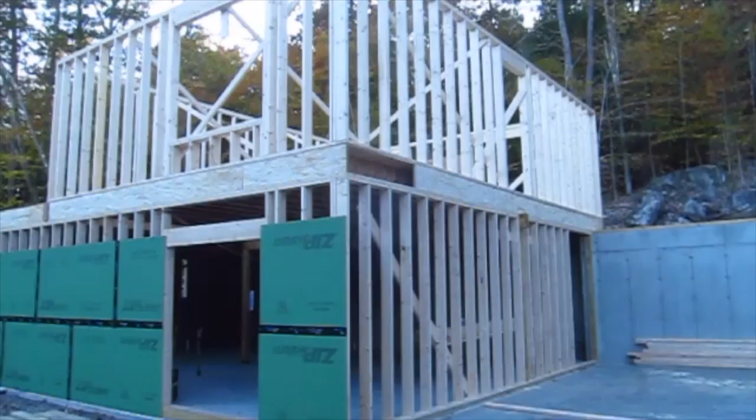Tim Carter, AskTheBuilder.com. It's day number 2 of the rough carpentry, and they got a lot more done. Let's take a look at what happened. First of all, remember, I am not building this home. Any mistakes you see, they're not mine.

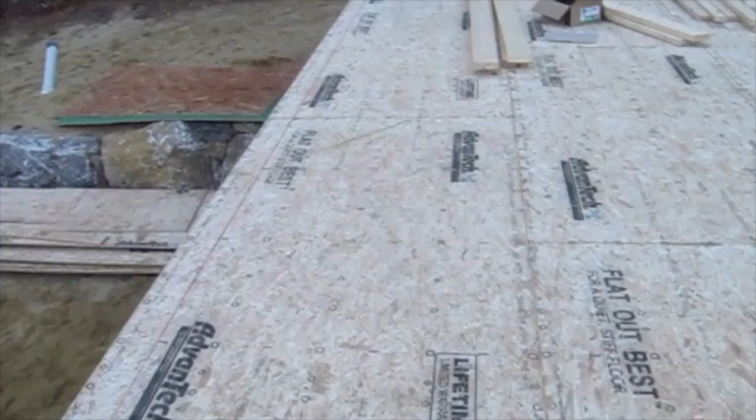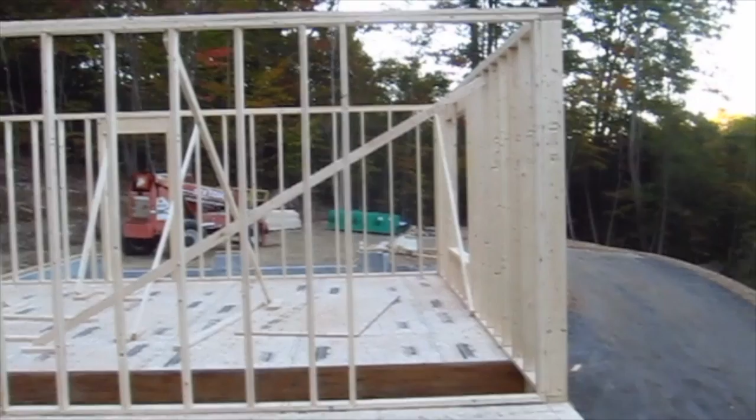Let's get started. Here's the dance floor. They got the subfloor on. In fact, they had the subfloor on this morning by about 11 o'clock, 11:30. I stopped up to try to get some action shots, but it was a little too busy here. I didn't think that they would appreciate it. But you can see that they got the subfloor completely on, and they've got half of the walls built here

for the, you would call it second story. Well, it's second story here on the front, because you can see we're pretty high up off the ground, but back in the back of the home, it's only about 4 feet off the ground. All right, let's take a look at a few things. This is going to be an interior wall right here, this long wall. And I just wanted to explain, I talked a little bit about this in the video yesterday, but this is a diagonal brace to keep this wall square so that it doesn't rack one way or the other.

But kind of surprisingly, they put some nails down here at the bottom, and they put about 4 nails up here at the top. They didn't put any intermediary nails. It would have been nice. Just helps hold it a little bit straighter, that's all. But anyway, that way this wall is not going to rack. It's not going to tilt this way or that way. And that's a good thing. And you can see they have all the other walls they built braced really well. A lot of bracing in here so the walls don't tip over.

Here's another diagonal brace with this 2x6. But they also started to put the sheathing on, which absolutely will keep this wall stiff as can be. But we're going to go out and talk about the sheathing because I feel they made a big mistake.

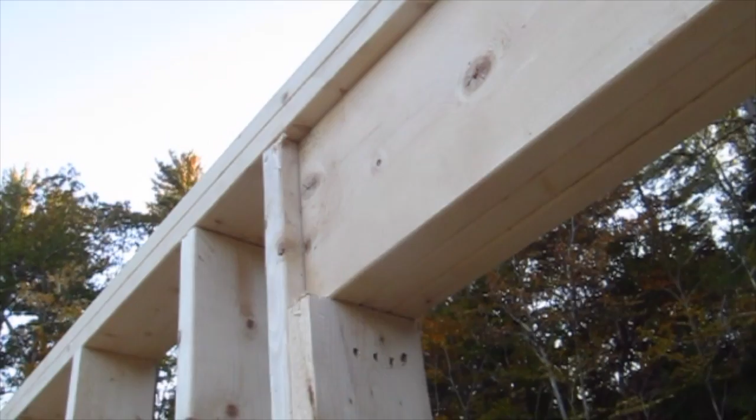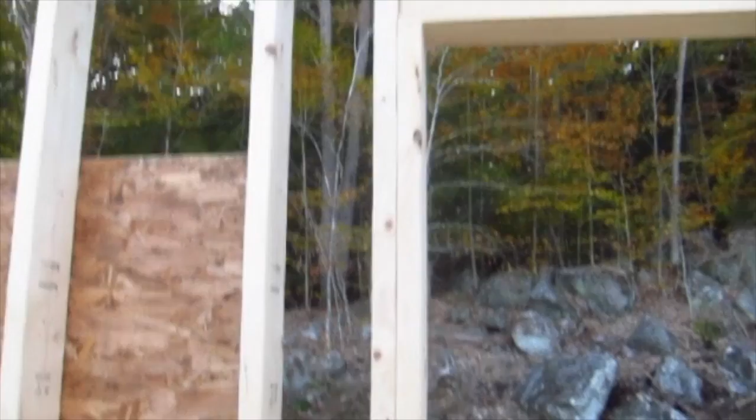Here's another example of a header that I believe they made a big mistake on. All right, so it's a triple 2x10 again here. Only needs to be a double. And here's what's really interesting. Notice here, they've just got one jack stud. And this opening is very similar to the window downstairs. Remember, we talked about on day number 1.

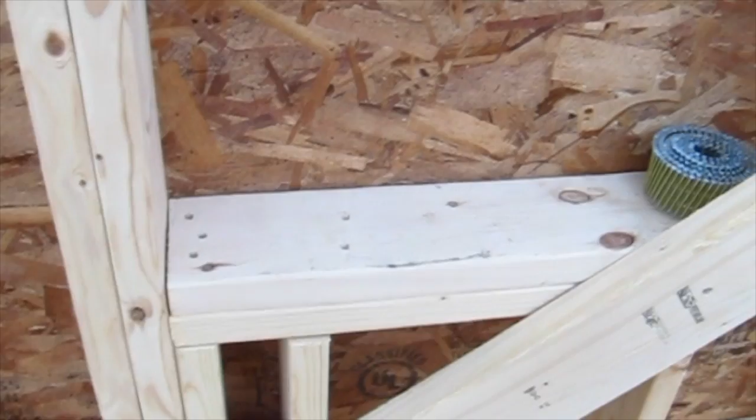They also did put another double sill here, double rough sill, 2 2x6s. That, in my opinion, is a waste. Remember, these sills on a window, the only thing they support is just the weight of the window. I mean, it's virtually nothing. And you've got the cripple studs underneath here. So a double is just a waste, just more heat loss basically, and you don't want that here in New Hampshire, I can tell you that.

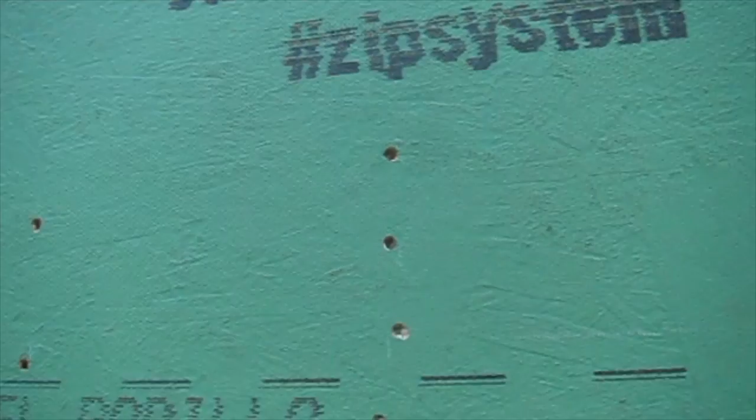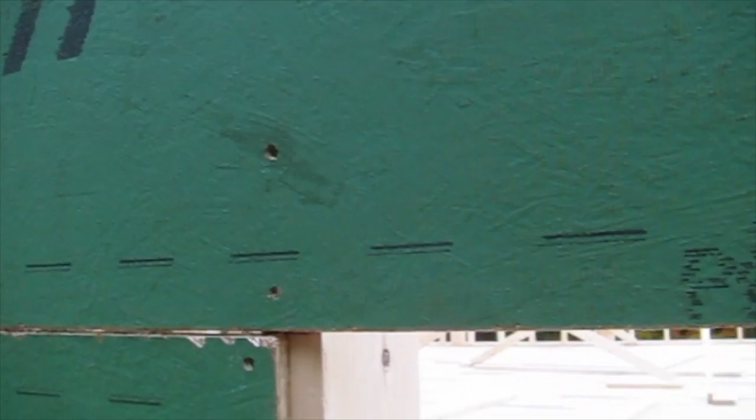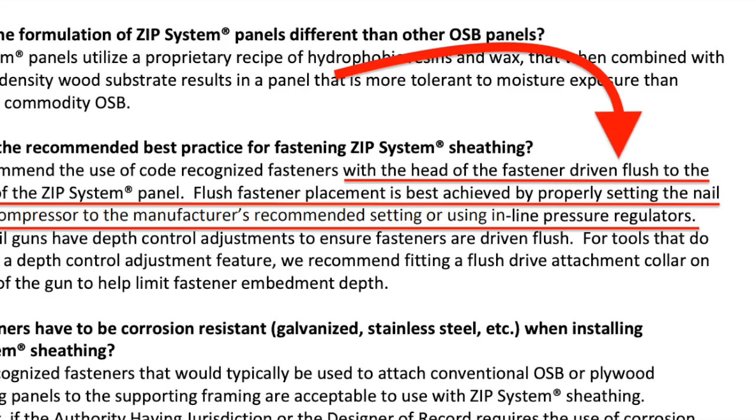This is the zip sheathing, and here's the big mistake they made here, and you can easily verify this. All right, these are the nails. These are probably 8-penny nails they shot in, but the nails have gone in over a 1/4 inch deep. They're recessed, all of them, every single one. They have the pressure on the air gun set too high. And if you go to the Engineered Wood Association website, they have a technical bulletin about this. The head of the nail is supposed to be flush with this green surface. It's not supposed to be recessed.

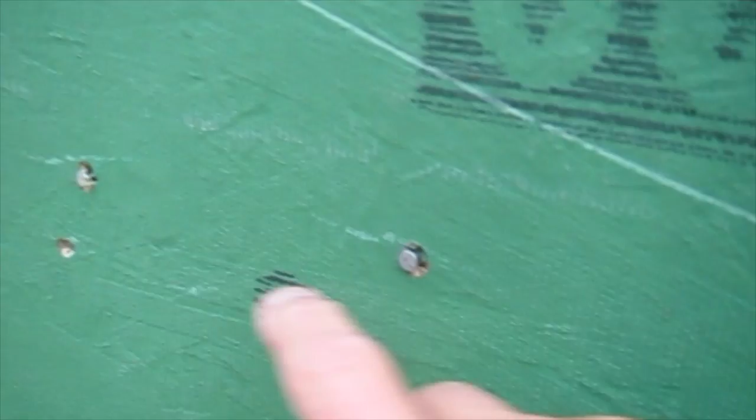Big, big, big mistake. It really, really compromises the strength of the sheathing. And every single nail that I see is overdriven. And actually, here's a few that are not gone in far enough. Here's one that's proud, it's sticking out of the surface. Here's another one that's proud. So that's a bad thing.

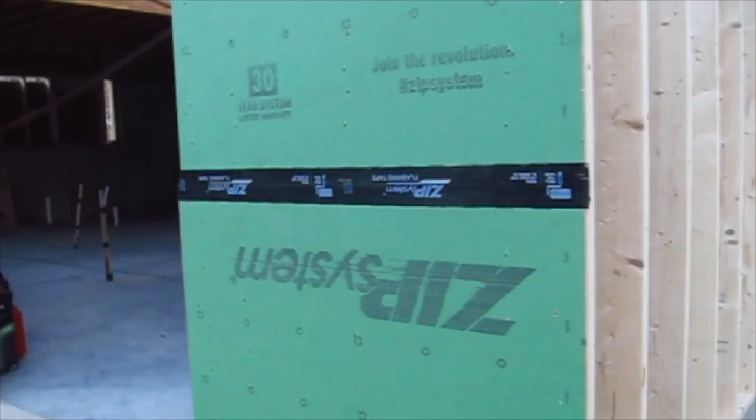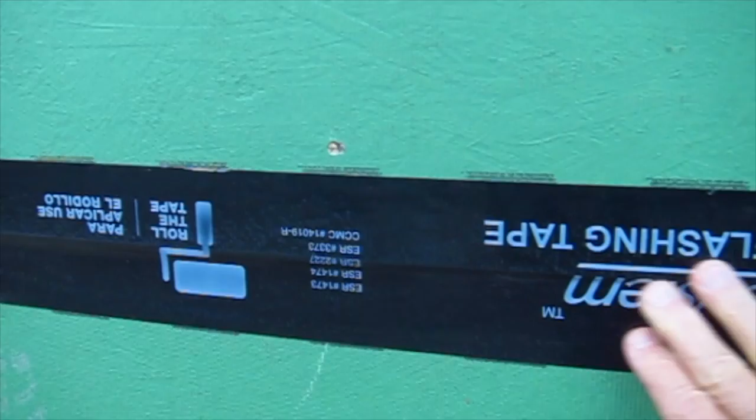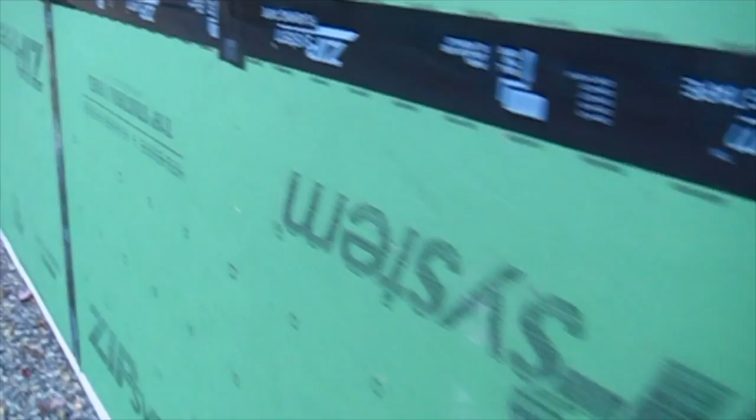I'm now down here at the front of the home, and let's look at the zip sheathing down here. It's the same problem. You can see right here, all these nails are overdriven. They're all too deep. They did start to put the zip tape on, which seals the seam between the two pieces. I'm not a big fan of the zip tape. I'm not a big fan of this system. And I'll tell you why. Let's see if I can show you why here. My biggest problem with it is they're not going to put an air barrier or a water barrier on top of this.

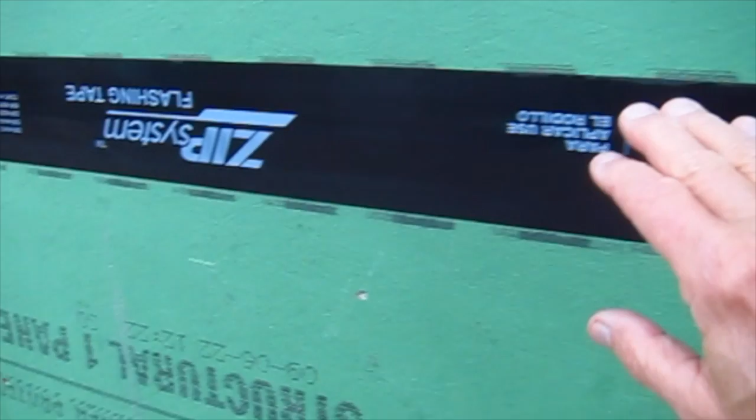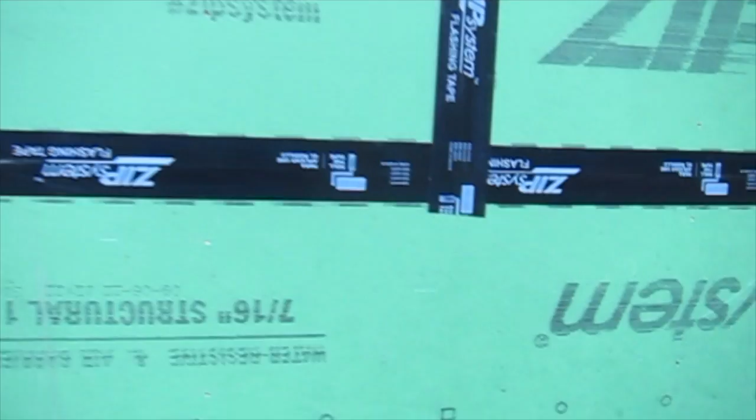And over time, what happens when this adhesive fails? And there's a really good chance it's going to fail, all right? So then your waterproofing system is compromised. All that the waterproofing counts on is the adhesive of the zip tape. I don't think that's a smart idea.

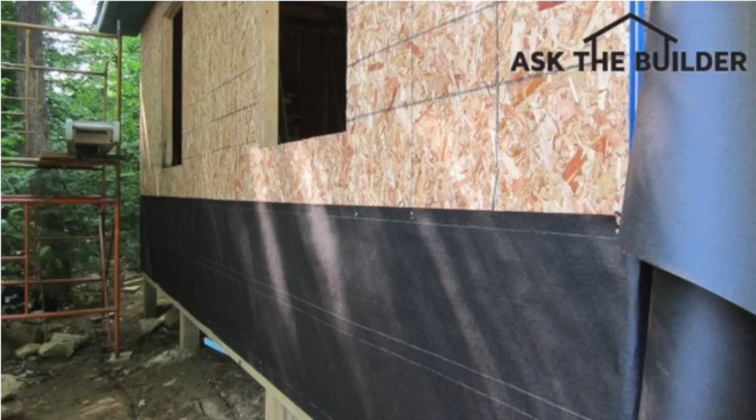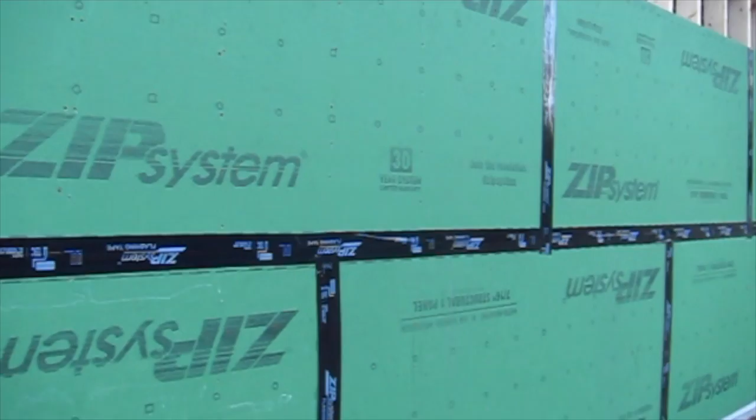If you go back in time, the old builders used to use tar paper, overlapping sheets of tar paper, which were protected from the elements by the siding. And I have taken apart 100-year-old houses, 100-year-old tar paper. It was a little brittle, but it was still water repellent. You could put water on it, it would bead up. And those houses had never rotted out. They were dry as a bone. Just not a big fan of the zip system.

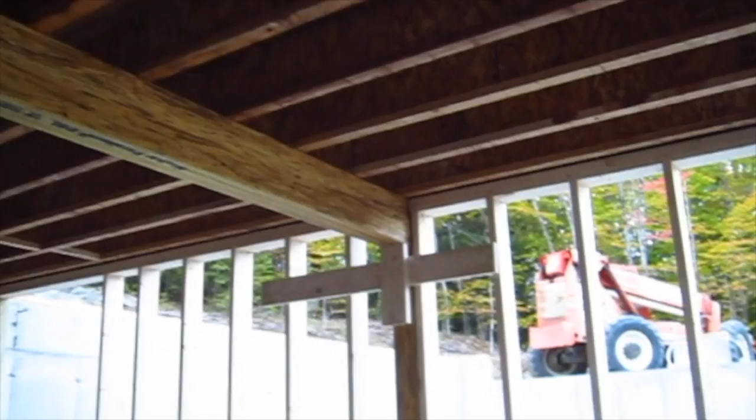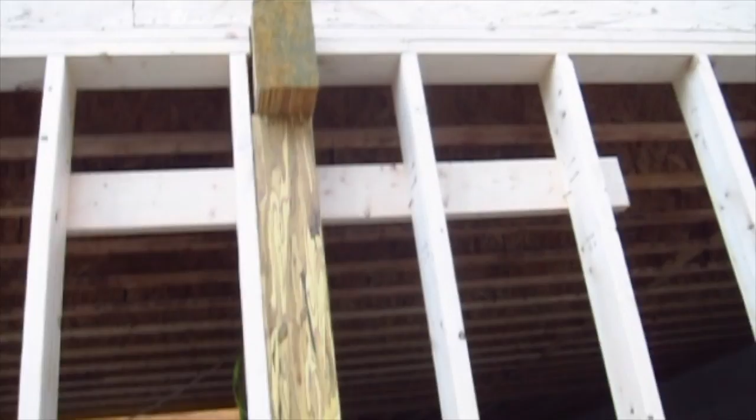All right, let's talk about this big beam again. Here's that beam. Well, guess what? They finally installed the correct supports. I know it's really hard, you're getting blown out. Let's go outside here. They used another piece of treated engineered lumber here to support this end of the beam. So that's good. That's a good material, especially since it's treated.

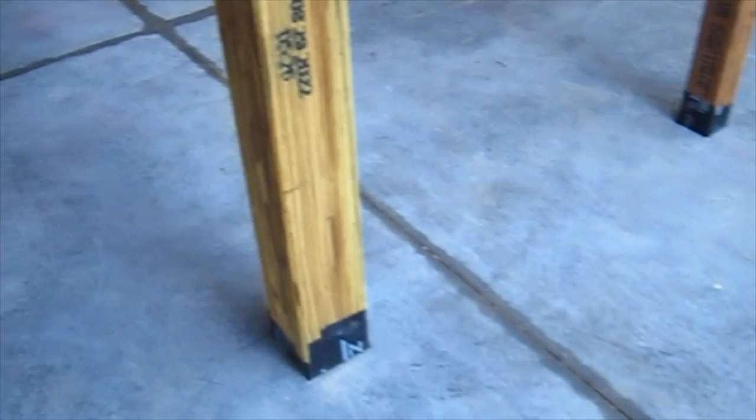And then they did the same thing here. They've got a piece of treated here underneath this end of the beam. I know you're getting blown out by the light, but trust me, it's a piece of treated material. They also did something I think really interesting down here. They wrapped the underside of this with the zip tape, but I have no clue how in the world they have fastened this to the concrete. It appears that there's no mechanical connection here or on the post next to it. I find that very odd.

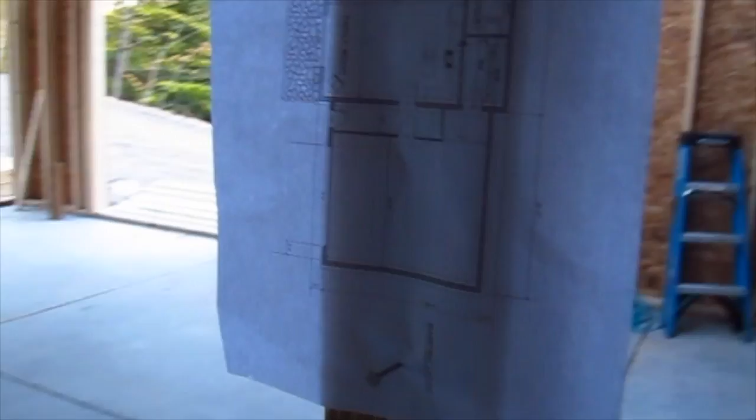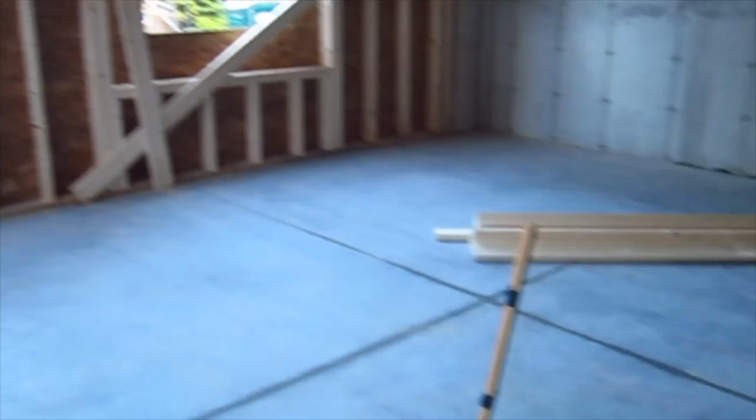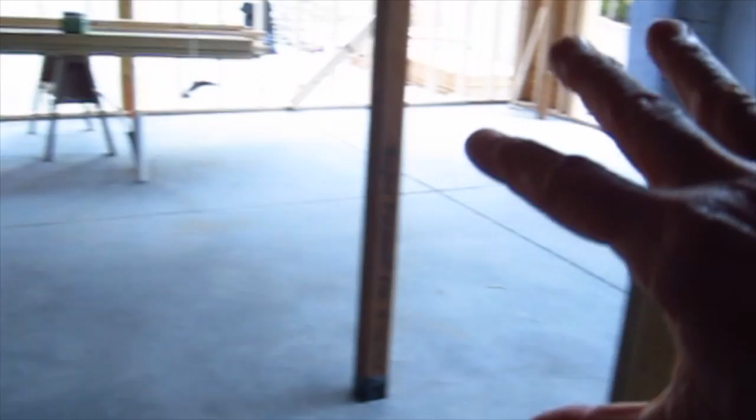But here's the good news. This is the first time I've seen a plan. This is the floor plan of this lower level where I'm standing. And based on that, believe it or not, the master bedroom is right here in this corner. And there's going to be a small, tiny bedroom back in this corner. And out in this giant area here, which is opposite the garage, this is going to be a giant family room. Really kind of an interesting plan.

So this is going to be the master bedroom. I would have never guessed that. I would have put the master bedroom upstairs. But what do I know? All right, let's go over here.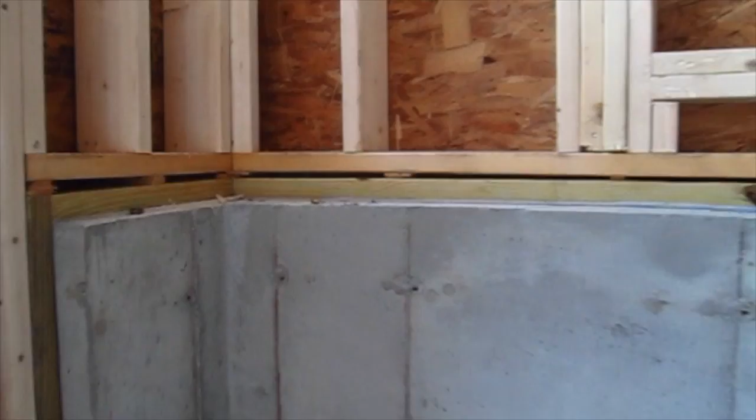So they put the sheathing on the walls out here, but it appears at this point they still have not decided to shim underneath the studs where they're supposed to. These are load bearing, and there's a gap right here. That's just not acceptable. And look on this side of the window here. This is all load bearing, and there are joists on top of it too. There's a floor up here.

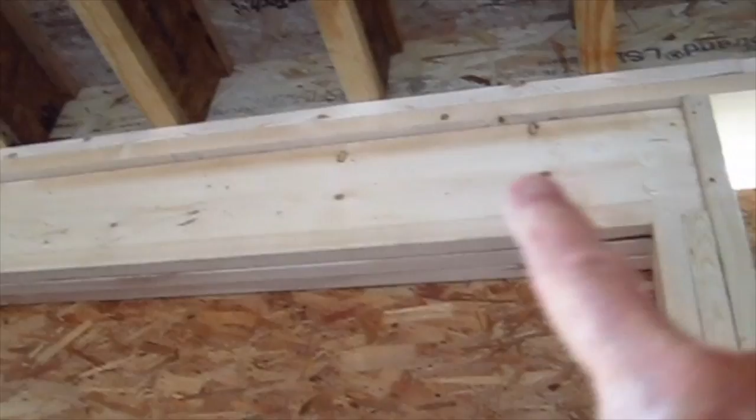So there's a lot of weight that's pushing down on this header that then translates the load down to these jack studs, and there's no shims here. That's horrible. Crazy. I knew that would happen, but I wanted to wait and see for myself. They still may save themselves, and before they're done with rough carpentry, maybe they'll come back and fill that in.

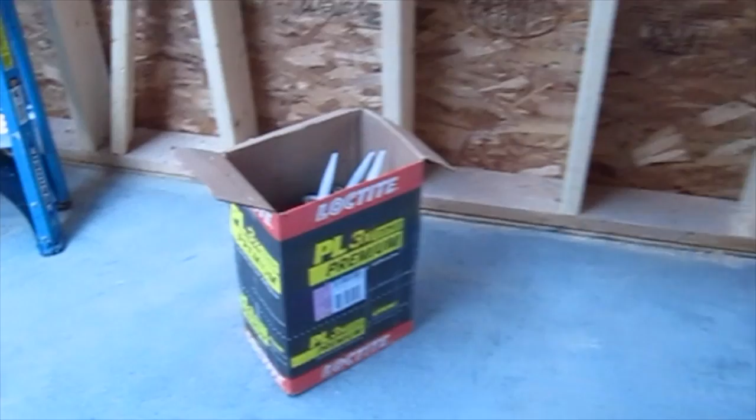Well, here's the good news. I didn't see any empty tubes outside, but this is a partially empty case of glue. So it appears that they used glue to glue the subfloor to the truss joists. I don't see any oozing out, but at least we know there's a really good chance they put down some glue. That's a good thing.

Day number 2 is complete, and they got pretty much done. Looks a little willy-nilly. There's just kind of unfinished sheathing in places. I'm standing here in the lower garage, and remember, above me is going to be a concrete floor, I think. We don't know yet. I don't see a plan of that. And I'm still waiting to see how they're going to do this part of the job. It's going to be really fascinating.

And so far, I'm going to give these rough carpenters a C+. That's about all. I've seen better, a lot better, and I've seen a lot worse. So we'll see what happens tomorrow. They might be able to get the rest of those second-story walls on and probably have a lot more sheathing put on, would be my guess.

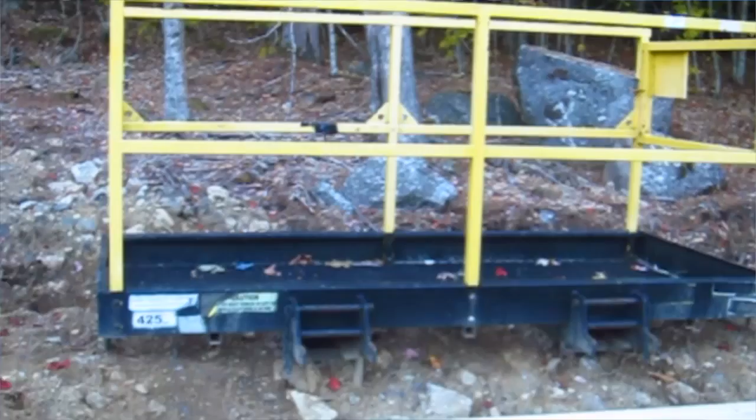And they've got a nice big Lull here, and they've got a contraption they can put on the end of the Lull that allows two men to stand up and work in the air. That's how they're going to put the sheathing on. I don't think it's as easy to do it that way, but what do I know? I used to eat lunch for 20 plus years sitting on overturned, empty drywall mud buckets, right?